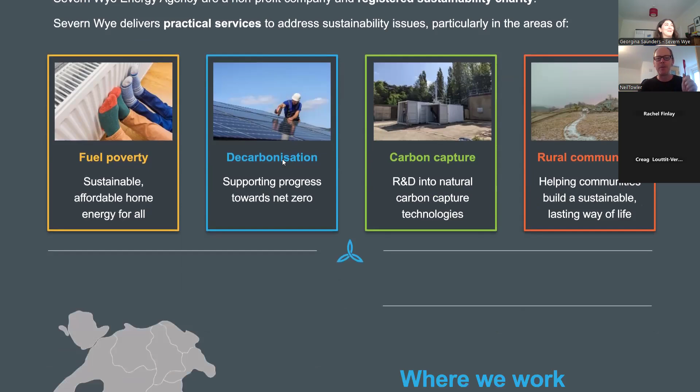You move on. Maybe I hold up my phone with a pen. I don't see one.

Where we work - we work across Wales and the English border counties, so Gloucestershire, Herefordshire, South Glos, Wiltshire, obviously. We do stray into some of the other neighbouring counties as well, so Worcestershire, for example, maybe occasionally into Bristol, that kind of thing, but typically that sort of southwestish type area. We've got a head office in Gloucester Quays - if you're familiar with Gloucester, it's one of those old warehouse type buildings in the Quays - and we also have an office in something called the Hive at Llandrindod Wells, which is central Wales. We've got an office there as well.

About a bit more detail to what we do, the support services we offer. Fuel poverty is one of the things we were initially set up to do, because the company actually started - we just celebrated 25 years a couple of weeks ago. I haven't been there for all 25 years, only 15 of those. Fuel poverty is what the organisation was set up to initially alleviate.

We run things like home energy advice lines for householders in the counties we work in, and energy advocate services, typically working with households that are perhaps in fuel debt, living in cold damp homes, working alongside their energy suppliers.

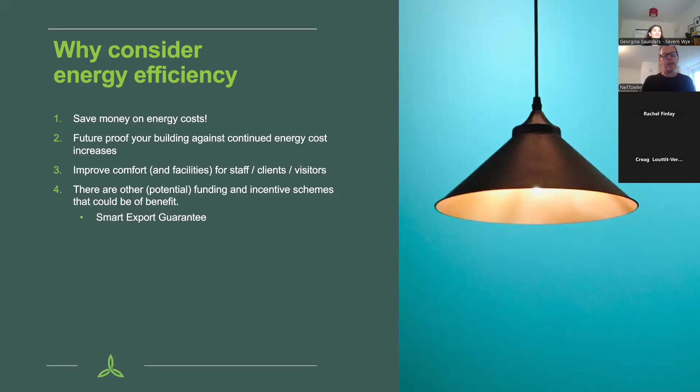So there are other funding schemes that you could take advantage of at the moment as well, and this could change in the future. So the Smart Export Guarantee, if you're not familiar with that, very briefly, it provides a payment for any solar electricity that you feed back to the grid. So you can get a small income from that.

There's a boiler upgrade scheme. So if you're replacing a fossil fuel heating system like a gas boiler, replacing it with a heat pump, air source or ground source heat pump, you can get £7,500 towards the cost. That's something that's available for domestic, but it's also available for relatively smallish commercial organisations as well. Heat pumps up to a certain size can get that funding as well.

Workplace charging scheme is you can get funding for electric vehicle charging points. I think it's £350 for each charging point you put in. So there are other funding schemes out there as well, or incentives that you might be benefiting from or could benefit from. Number 5,

being an exemplar. As you probably will know, people are increasingly interested or wanting to know what organisations are doing and that they're doing their bit around the climate emergency. So if you can demonstrate to your clients that you have an action plan in place, you've had an energy survey, you're actively looking at making improvements to reduce your energy use, you're perhaps more likely to hold on to customers or make new customers who are aware of these kind of issues.

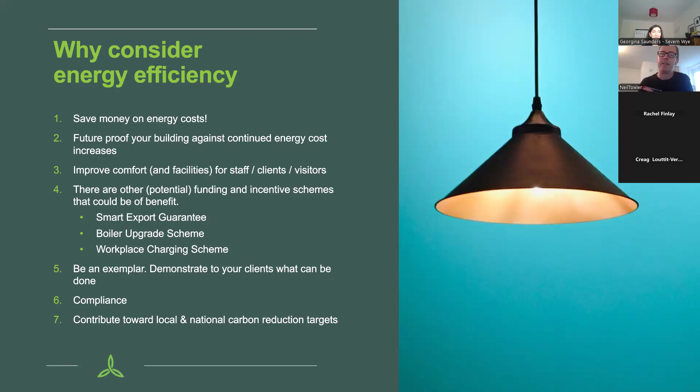Number 7, it's again perhaps an obvious one really, but you'll be doing your bit basically to contribute towards local and national carbon reduction targets. Wiltshire Council have declared a climate emergency, and obviously we've got national targets around carbon zero. You can do your bit as well, basically. You might think of other things as well there. There's probably other reasons to consider energy efficiency, but those are the ones I kind of thought of relatively easily.

So I was just going to go over briefly the different types of things that you could potentially be doing under this scheme to improve your building, and potentially those things that you could be applying for funding for.

So insulation and building fabric. We typically start with the fabric of the building first. If you can reduce the energy demand of the building from heating, then it kind of leads on to everything else. So there are different things you could be doing with the insulation, the building fabric. Wall insulation is an obvious one, but cavity wall insulation - so if you've got a building that's built from roughly the 1920s to the 1980s, you might have cavity walls. Chances are, then, if it's from between those periods, they might be cavity insulated.

So that's a relatively low cost and quick and easy thing to do. If you've got older solid brick, solid stone walls, or an old warehousey type building, it does get a bit more complicated. You can do external insulation or internal insulation. It's more expensive, more complicated, but possibly with this funding, it might make that difference in making that viable.

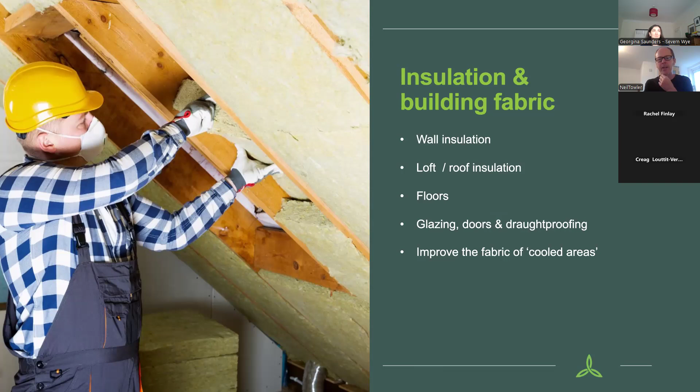Space and water heating and cooling - that's typically the next thing that we look at. So we'll be looking at what you've got there currently. And if you've got a gas boiler that's only a couple of years old and it's working fine, chances are we'd probably think that you could leave that there.

But if you've got perhaps an old gas boiler, an old oil boiler, for example, then we'd be thinking about what you could do to replace that. That could be putting in a more efficient gas boiler or more efficient LPG or oil boiler, and that will translate to some savings - there might be a 20% efficiency improvement on that boiler, for example.

But equally, we'd also be looking at alternative options for you as well. Heat pumps would probably be the obvious alternative for you to look at potentially. I'm not going to go into the details of how heat pumps work at the moment, but essentially they can bring in free energy from the air or from the ground, and it can then feed into an existing radiator or underfloor heating system.

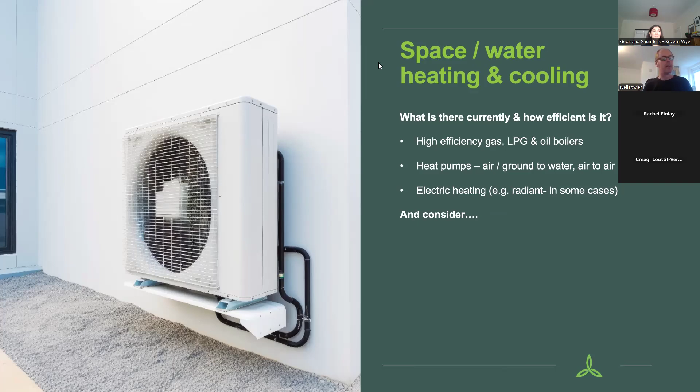If you've got a big warehouse type building or workshop areas, in some cases it doesn't make sense to try and heat up the big volume of air in that area. You might just need to heat a couple of people at a workstation in a corner of the building. So it might make more sense to look at things like radiant or infrared heating, which just heats the person or the object, as opposed to trying to heat up that big volume of air. So there are different options for different properties and different buildings.

But yes, and to consider what other future improvement works to consider.

If you're thinking about things like solar PV, and you're considering moving from gas or LPG boilers to heat pumps, a solar PV array could help to mitigate that additional electricity requirement, particularly in the spring and autumn shoulder periods. Not so much in the winter, obviously, because you're not going to get so much solar then. But they can help to mitigate that additional demand.

Possibly if you've got battery storage there as well - maybe if the building isn't used over the weekend, you could store up some energy in the batteries to help with the additional electricity demand over the week. So there are other factors to consider when you're looking at your heating as well.

Just to emphasise, if you're serious about moving to zero carbon or as low carbon as possible, you're going to have to move away from fossil fuels - almost certainly. So you're going to have to ditch gas or oil essentially. Typically that would probably be to a heat pump, but it could be some of the other things we looked at as well.

And just to mention other funding incentives as well - things like the boiler upgrade scheme, which could be available, which could make that difference to a heat pump making financial sense for you.

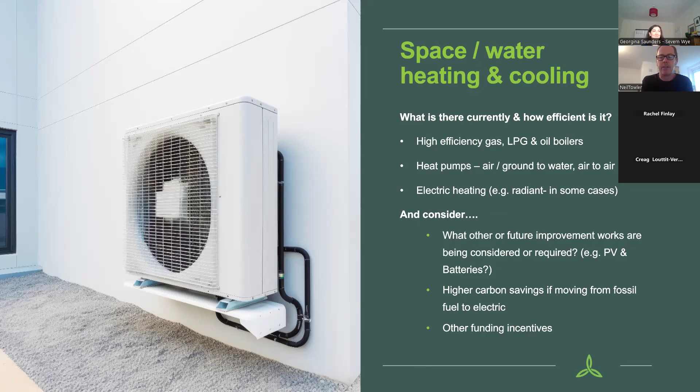So space and water heating controls as well - that's something else we will be looking at. We'll look at the existing controls to see what they currently allow you to do. Now, if you're replacing a heating system with a completely new one, chances are the installer will specify up-to-date heating controls for you, and that will cover that aspect.

If you're keeping your existing heating, then we will be looking at whether those heating controls give you the control that you need to ensure that you're not doing things like heating areas that don't need to be heated, or the heating coming on when it's not needed. So we'll be looking at optimizing that as much as possible.

As a minimum, if you have a radiator system, we'd be looking at things like programmers, thermostatic radiator valves, and room thermostats.

Moving on from that, you'd be looking at things like zone control, making sure you're heating different areas of the building to different times and temperatures based on what's needed. For example, if you've got a building with offices but also workshop areas, you need to be heating the offices to different times and temperatures, probably, than the workshop areas - the workshop areas need to be heated probably to a lower temperature. So we'll be looking at optimizing the controls, or what control optimization there might be available.

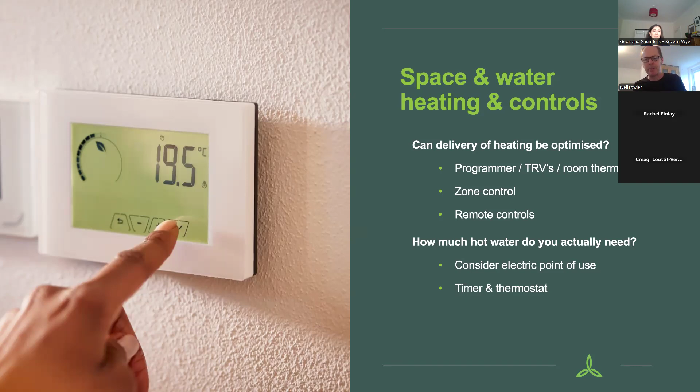And around hot water, we're just looking to see how much you actually need, because quite commonly people heat up big cylinders of hot water and they're only perhaps washing hands or doing a bit of dishwashing. It might make more sense to move to electric point-of-use heaters, multi-point heaters, but ideally we're looking to make sure that water is only heated to the time and to the correct temperature that you need it for.

I just want to introduce a few other options. This isn't an exhaustive list - there'll be plenty of other things you could be thinking about as well, but I just want to put in a few examples. These are things that potentially could be grant funded as well.

LED lighting is an obvious one. It's probably the most popular improvement measure under our previous business funded scheme. Changing old fluorescent or incandescent lighting to LED can make quite big savings, particularly if you've got lots of lights, and it's relatively low cost as well.

Adding lighting sensors - things like motion sensors, daylight dimming, daylight controls - to make sure lights only actually come on when they're needed.

Ventilation - improving the ventilation potentially. So you've got things like ventilation with heat recovery, which might be relevant.

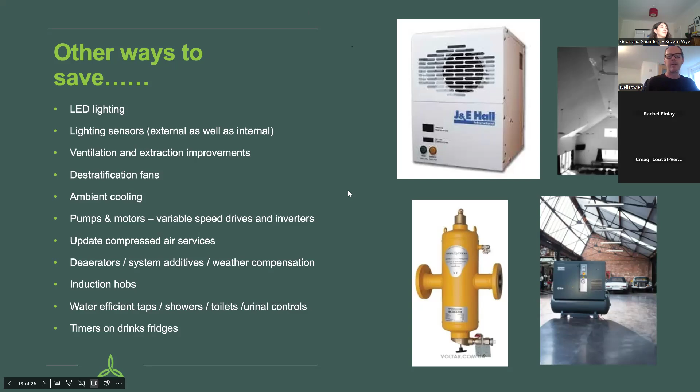And then briefly, renewables - once we look at everything else, then typically we look at renewables after that.

Heat pumps, as I mentioned before - plan for this prior to the heating system being replaced. Ideally we don't wait until your gas boiler goes pop in November and then think about a heat pump. You need to be planning this in ideally. If your boiler is getting old, you might want to think about it before that happens, because it'll take a bit longer to put a heat pump in potentially. But solar is going to be probably the main renewable otherwise that we can be looking at.

It could be solar thermal - that's heating hot water only. It's probably only going to be relevant if you currently use a lot of hot water, so maybe showers, perhaps if you've got a lot of showers, especially if you're a cricket club or something.

But solar PV is more adaptable and flexible, I suppose. Size it with current or future demand in mind - essentially you need to bear in mind that your current demand for electricity might be different in the future, particularly if you move to things like heat pumps, or start to think about putting electric vehicle charging points in for staff or visitors. You might want to consider that a bigger solar PV array is probably going to be more cost effective or future-proof the building.